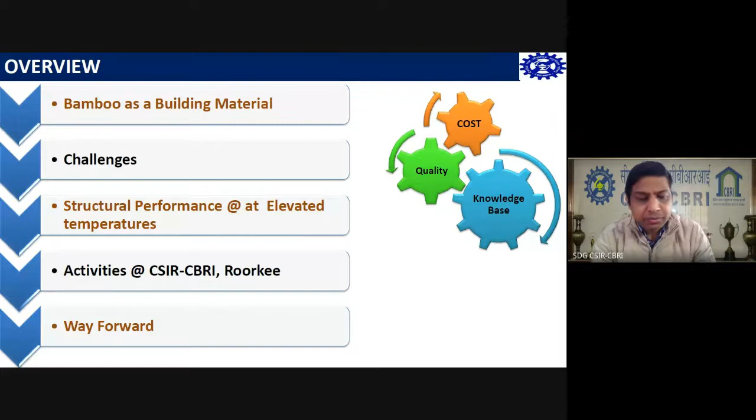Now, to start with, bamboo is naturally, inherently a composite. Right now, if we talk about RCC, RCC is also a composite. Bamboo is a natural composite, but it is a natural product, so it doesn't have - it is imperfect. It is perfect in its own imperfections.

Having said that, it depends on the topography, the surrounding climatic areas where it has formed. If you look at the microstructure, for a layman, or one who sees it in a broader sense, we can see that it is the fibers, the fiber bundles, that provide the strength to this beautiful natural composite.

But it's not just that. During the course of the presentation, I will discuss the parenchyma - these are the structures, the holes, the network, the matrix that holds the fiber bundles together. Now, what role does that have, how does it impact the strength or engineering properties of the material? We'll try to get a perception of that.

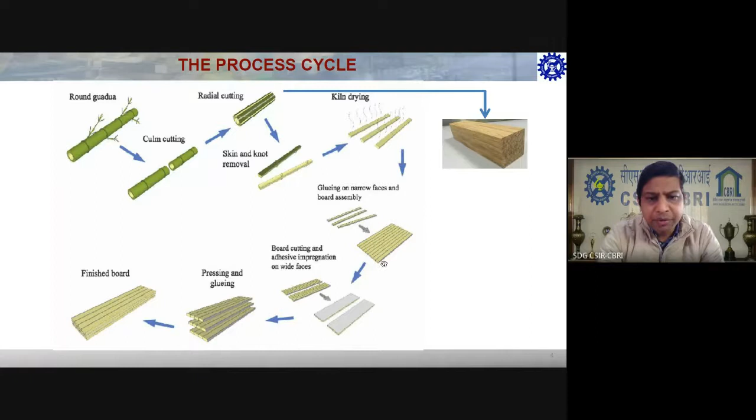Now the process - round bamboo, right now in the construction sector, when we talk about using bamboo as a construction material in structural form, generally we have various processes. The round form, if cut and processed with kiln drying, becomes wood which becomes a scrimber, and from there it can be glued to make plyboard, and the process continues. But in this particular presentation, I would like to confine myself to this type of round culm bamboo - structural form using round culm bamboo.

I personally believe this particular form has a low energy demand, and it is the natural avatar that mother nature has given us.

Other than this, the other things generally incorporate various energy intensive processes, be it gluing and pasting, or other chemical or factory treated things. This particular thing is in a natural state.

So let's talk about, in this particular session, this particular form in its structural application.

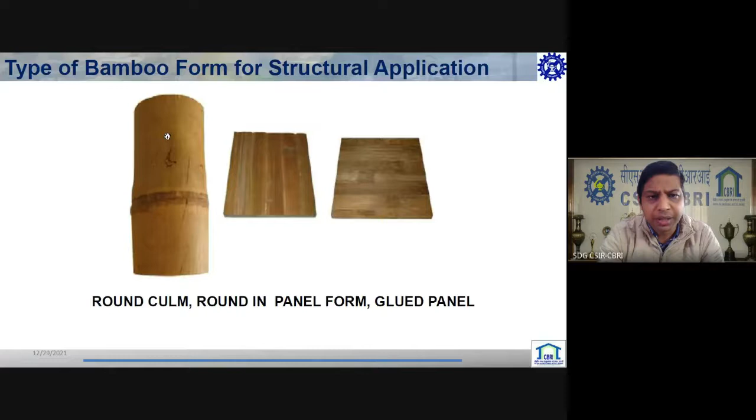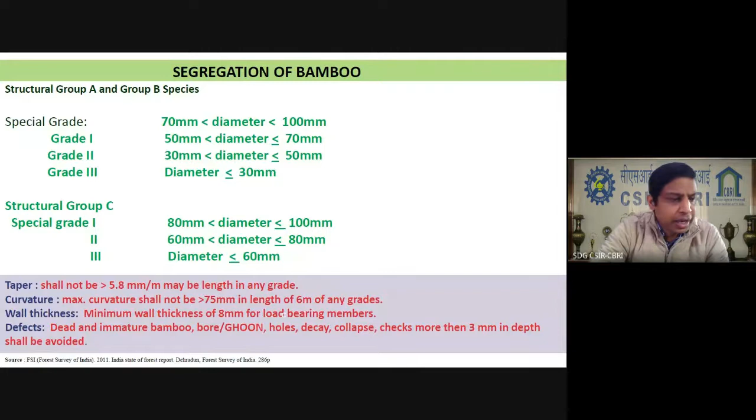As already mentioned by various people, this segregation of bamboo generally can be graded into three sub main special grades, and again this is according to our NBC 2016 guidelines, part 6. These are out of n number of species found in our country. 16 species, as mentioned by previous speakers, have been laid down by our NBC, which can be used for structural application in construction sector.

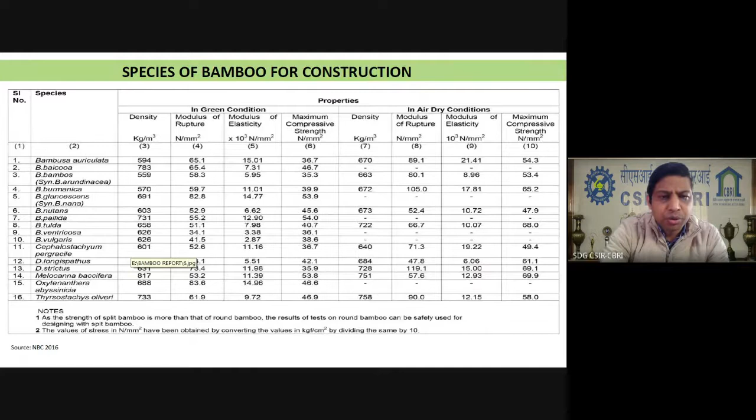In this also, these are all very basic properties which to start with. It's like the ABC which we need, even when we start to design a structure. Okay, these are some of the codal provisions.

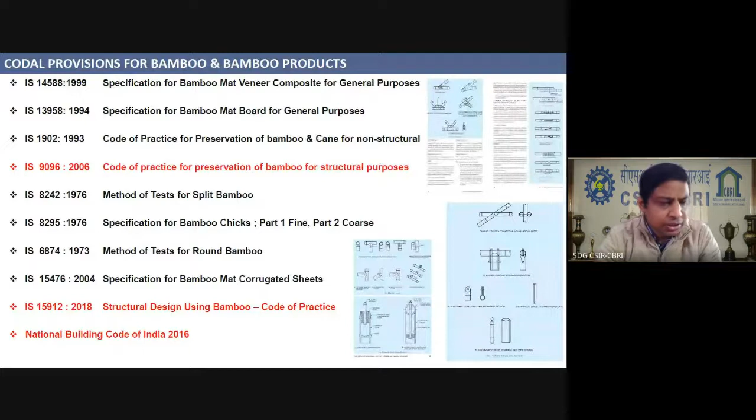As I was very keenly listening to Dr. Manjunathan ma'am, she had very nicely said - I was listening to Pandey sir also yesterday - that we were at the forefront in designing, coming up with the codes. That was a great initiative we had taken, with the 1973 method for testing round bamboo and all.

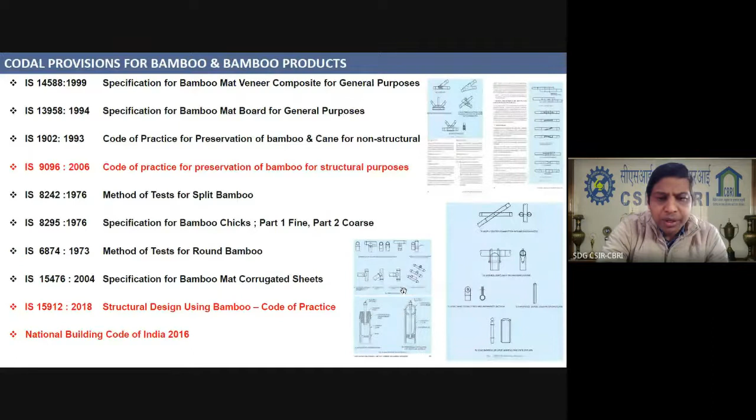But after that, generally it had died down, and we did not carry that forward. Somehow it got lost. So what generally happens, if you can see this, even this code which is recently new - structural designing using bamboo - NBC has very nicely given these joinery issues. One of the major issues in promoting bamboo construction is the joinery issues.

Now if I take a glimpse into NBC, we can very well say they have very nicely mentioned this joint issue, how this can be joined - the lap joint, dowel bars. But what will be the failure mechanism? What will be the load carrying capacity if we keep two dowel bars? And what type of dowel bars? These things need to be quantified, which is in a very nascent state, and our code is generally silent on that.

Now suppose we take this lashed joint. We know it has to be - the gusset plates are okay, chalo, it is steel plate, they have mentioned 3 plates minimum can be used. But when we say about this hole, what should be the spacing of this hole? Because we are not connecting steel with another steel, we are connecting steel with a natural product - bamboo itself is a composite. What will be the failure mechanism?

What should be the strength of this joint, for example this lash joint? And due to the friction, as time passes, what is the loss in joint strength? These things need - until and unless these things are codified and brought into the form of design charts - it is very difficult to have the confidence to design the structures.

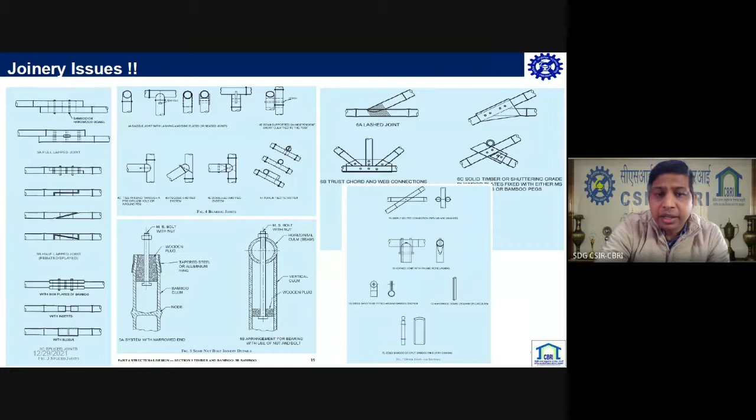And to be very honest, the reasoning behind the results - not all of the reasoning is known to us even now. Yes, bamboo as a building material is renewable, sustainable, protects riversides, strong in the parallel direction to fiber, and captures CO2. These are very good things that motivate us to work.

That's good, but then there's the lack of standards, absence of design books, no regular subject. This is what my previous learned speakers have been saying - we do not have, in the curriculum, where civil engineering students are even exposed to this, low engineers' confidence because of lack of design engineering properties or values.

So if the goal is to move bamboo into practice in construction, what should we do? There is another big issue - supply and demand. How to guarantee supply and demand, guarantee a market to motivate investment in bamboo production, and ensure enough bamboo of high quality, good quality material is used to increase user confidence.

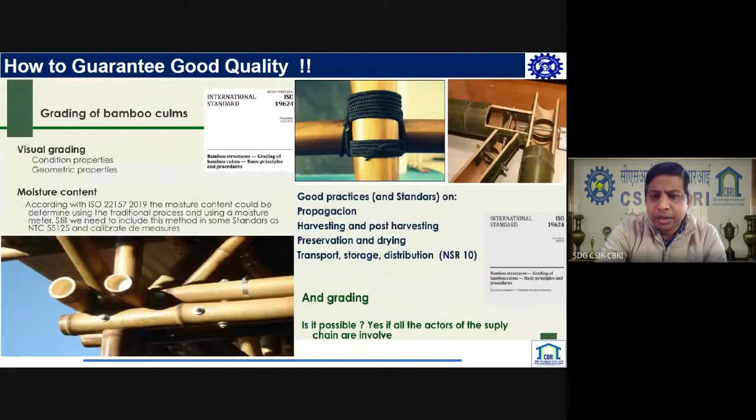Yes, people are working really hard in mainstreaming it, and I'm very hopeful that within the next year or so we can have systems where we can have the protocols of algorithms where we can generate machine grading algorithms for grading of bamboo.

Now, if I simply go into these joinery systems which people have been using, these are traditional, which look beautiful. But again, as I said, they lack engineers' confidence. What is the strength criteria? What will be the loss in strength when subjected to fatigue loading? Because the structures are lightweight, from an earthquake point of view these are very stable. It doesn't have that much effect, but it is more susceptible to wind loading.

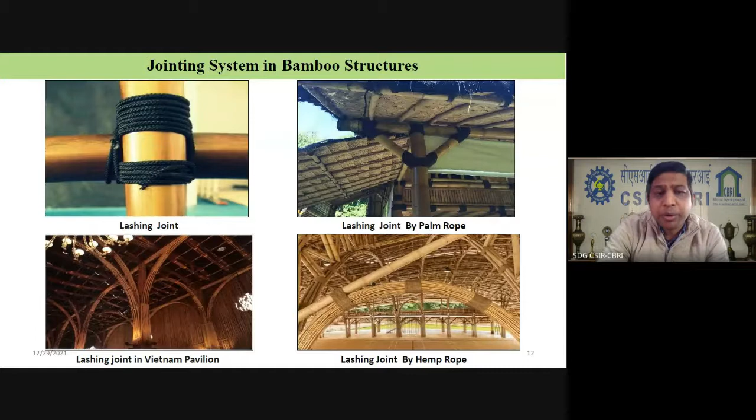Now if we come to this type of man-made structure, these are all traditional and it was going well, our forefathers have been using them. But when we go about jointing systems using bolted joints, this creates an issue because there is a difference in coefficient of thermal expansion between this natural product, that is bamboo, and this MS or steel pins. Now what effect will it have? It will generally have a drastically detrimental effect on these connections because of the difference in coefficient of thermal expansion, and that is really not a good thing in the long run.

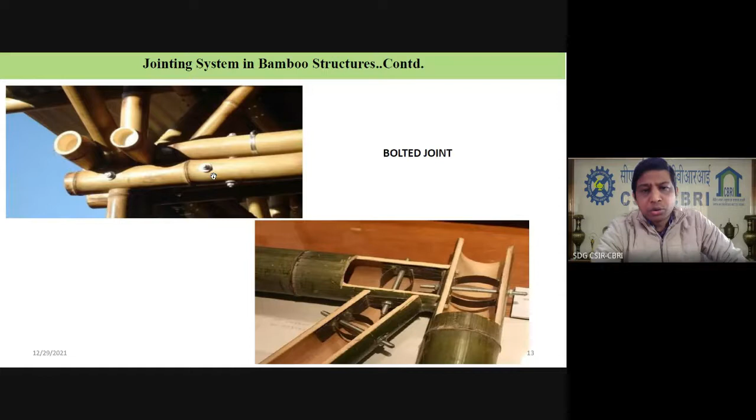Now, how to overcome this? We have to join the structures, and we cannot use this; it is not preferred. People are working, and these are the easiest. The easiest one is to have these dowel connections, creating nut and bolt. But in the long run, if it is a climate which generally has a large difference in day and night temperature, or in the summers it can become very hot, that will affect this natural material bamboo in a very wrong way.

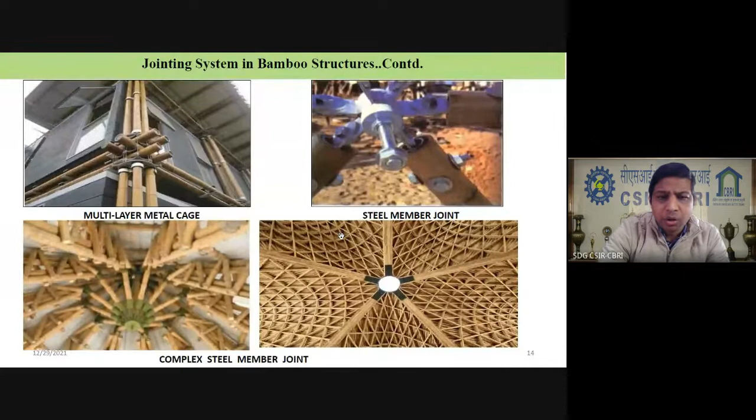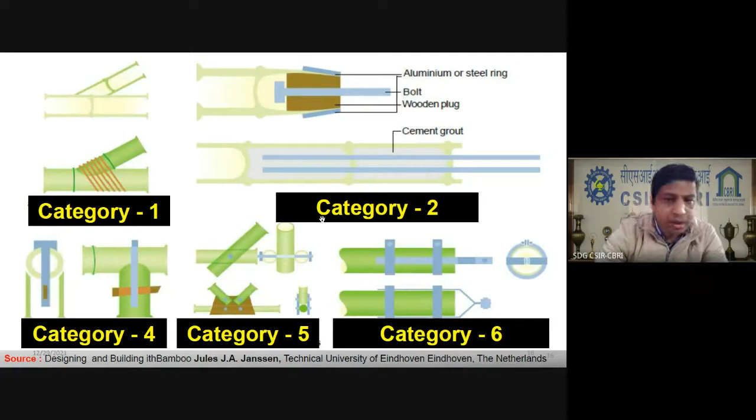So yes, there are certain types of joints. These are all in literature and available. There are basically 6 types using traditional joints, I'll say, using dowel. If we look into it majorly, we do not have a choice right now where dowels can be made of any compatible grade material with bamboo. It is still made with the same steel material, and it really affects that.

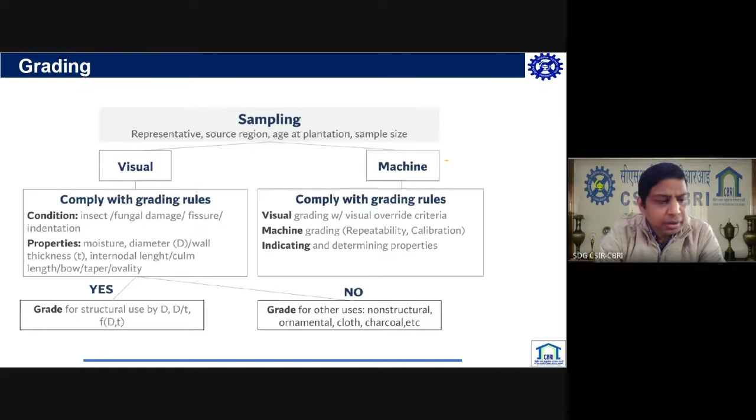Now, grading, we can say it is sampling. Basically, when we take up a project with bamboo as a building material, we need grading. Visual grading generally complies with grading rules: condition, whether it has insect or fungal damage, fissures, or properties: the moisture content, diameter, thickness, internodal length, taper, what is the bow.

Now, these are all codified by our own IS code. What should be the taper length according to the height? What should be the minimum diameter, minimum thickness of the wall? Right now it is all prescriptive. If we are not doing that, what will be the degradation in strength? What role do the OD, meaning outer diameter, and the ID play in imparting strength to the bamboo culm? This needs to be well codified and documented, so that we have the confidence to use it as a main grade structural material.

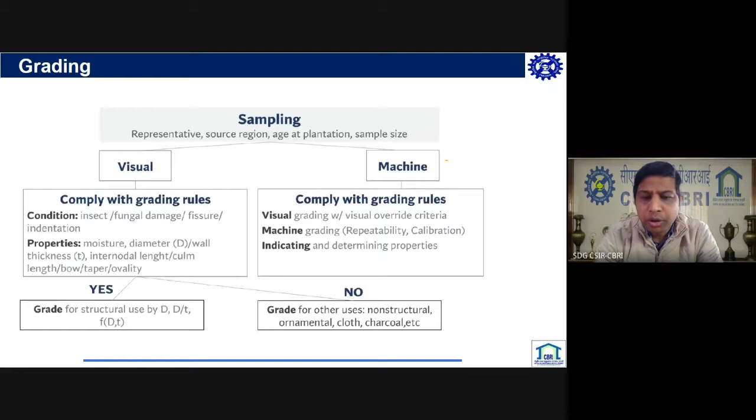Now, moving from visual to machine, is it even possible to grade this natural material using machine learning? Yes. How can grading work with visual override criteria? I mean, machine grading will definitely give repeatability and calibration. We do not have to wait for a person with certain experience. It will be an open platform, and those algorithms can be designed free of cost, and they can help us get away from human error and time consumption. So yes, secondary properties like species can also be machine graded, with extensive studies.

Till now, the majority of studies have been done on the fibrous constituent of bamboo, the fiber. Generally we know that when a bamboo structure is loaded, it has a tendency to sag, which happens because of the low E value. Then generally we have splitting issues. These are all because of the fiber. The fibers are placed in the longitudinal direction, and once it splits, it creates some issues.

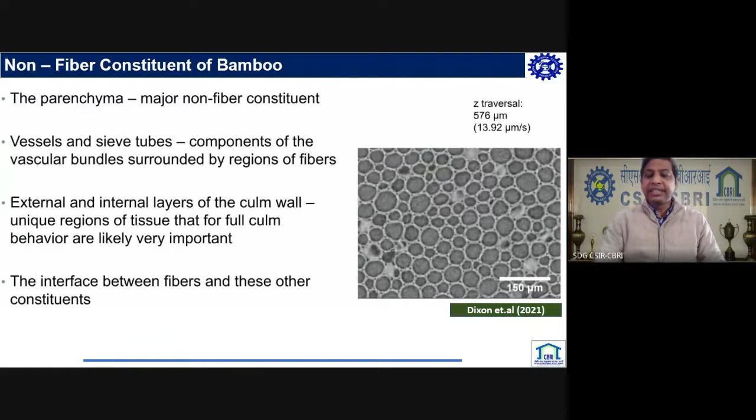But what about the non-fiber constituents? Do they have any role in it? Well, in fact, they do have a role. If you can see, these are all bundles, bundle fibers. I'd like to highlight one small point the listeners can correlate. We have ITZs in concrete matrices. How does the ITZ play a role? We have weaker zones and a stronger aggregate cement mortar. In the same way, the non-fibrous constituent also plays a major role in determining the joint criteria.

Now, this is Professor Rica in 2020. It's a latest paper where he has calibrated and tried to correlate how, in this zoomed view, the non-fibrous component is playing a role. Now, this is a very interesting parenchyma thing. I hope the screen cursor is moving. Okay, fine. If you can see, this is a bamboo. If I need to test it under compression, we'll put the bamboo and compress it. If it fails, we say the fibers have yielded, split, and given way. So we say that is the load.

Now, I want to test the parenchyma, the matrix which holds these fibers. How do I do that? How can I separate the bamboo fibers from the parenchyma and test the strength of the parenchyma? Structural engineering students and faculties who have joined will appreciate there are two types of nonlinearity: material nonlinearity and geometric nonlinearity. To study material nonlinearity, we need the material extracted, which is again difficult. For material, we can do slicing, take it out and test it under the microscope. But what about the geometric nonlinearity?

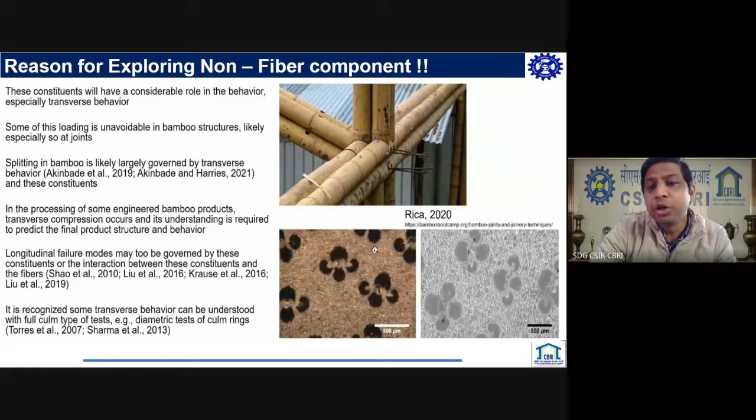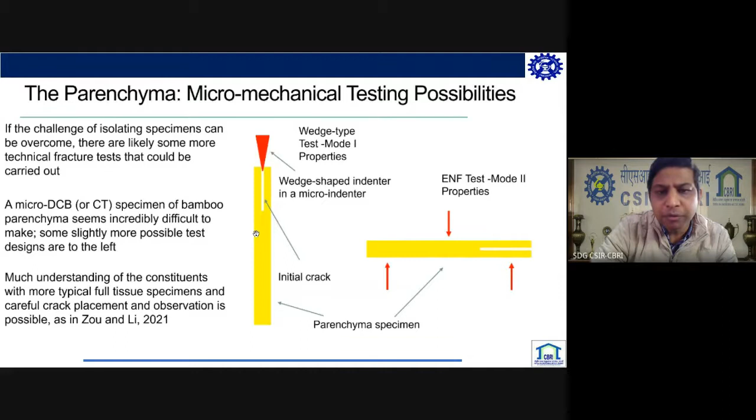And when we understand the material well, so yes, when we design a lateral load supporting system, we have to take the limit states, considering the strength of parenchyma into the design consideration. Now, moving forward, there are all micro mechanical testing possibilities, which are in a very advanced state. These are all very latest papers, and how to test them can be referred to. I will not go into much detail on it.

Now, this comes to a capacity-based design approach. Why a capacity-based design approach? During the course of the presentation slides, I will say why this capacity has come. Now, when we talk about bamboo as a structural material, with RCC we know what the failure criteria are that we need to design the structure for. For example, we always under-reinforce the RCC component. Now, in this particular case, which failure will we say is the probable failure, the failure which we need?

Sorry, I have not mentioned the paper name. I think it is missing, but no issue.

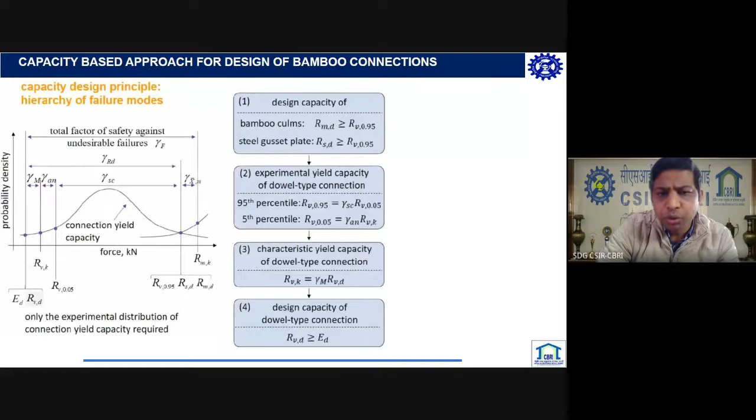It's a work of Dr. N. Pradhan, a researcher at Hong Kong University, where he says we will not allow the bamboo to yield. Before that, the dowel should yield. He has given a notion which again has some limitations, but he has given an approach which has positives and negatives. Now, what positive does it have? We will not allow the bamboo to yield. That creates some issues, which can be addressed by the type of connection details with bamboo and steel and the bamboo detailing. In due course, I will try to show that.

Now, coming to this, what about elevated temperature? Generally, we have a notion that this is a wood and it can get burned, right? It can burn, and in fact, it does. I personally have a few experiences, and the speakers from industry might also. In the last year itself, there were a few bamboo buildings, forest research and forest guest houses and offices, which were gutted completely when a fire took place.

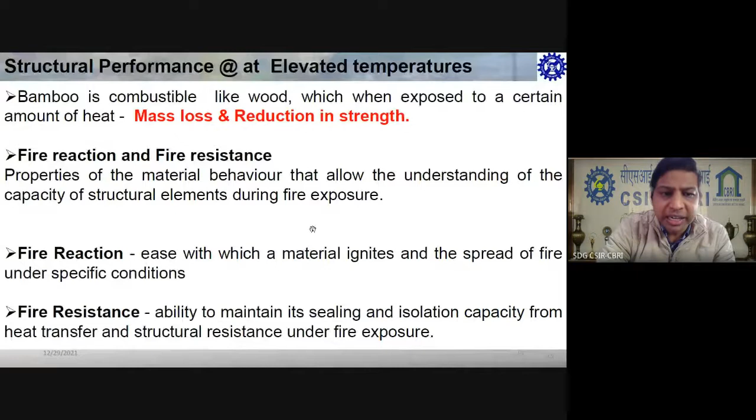So can it be designed? Can it be addressed? Well, it can be. It can be like concrete itself. We do not build buildings only of concrete; we use RCC. Now, if that can be composite, why not here? So can that be an answer to it? To some extent, yes, we can.

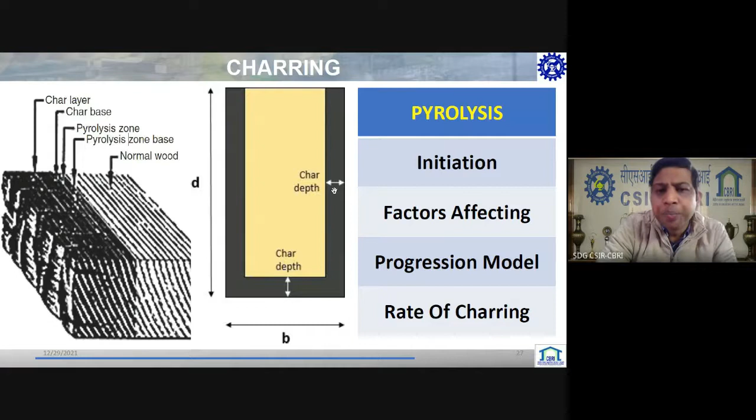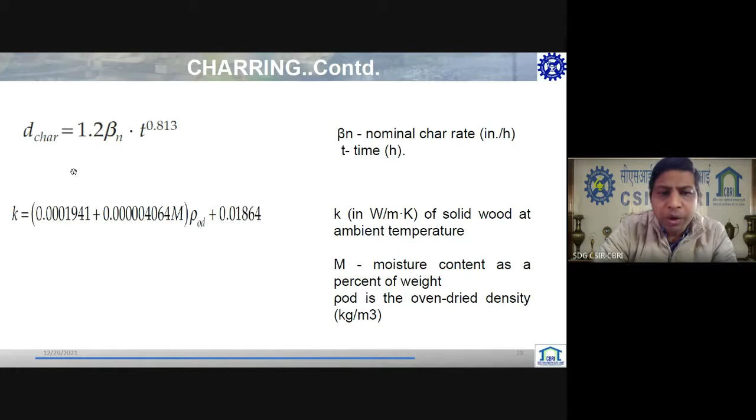Now, when this takes place, a charring effect takes place. There are initiation factors, then there is a progression model, the rate of charring. When charring takes place, the same thing happens with bamboo, considering it as a wood, so this char depth needs to be controlled in order to come up with design guidelines. These charring depth criteria and empirical analytical equations have been taken from the timber design theory of the American code, which is well laid down, and it appears to be in sync with softwood design theory.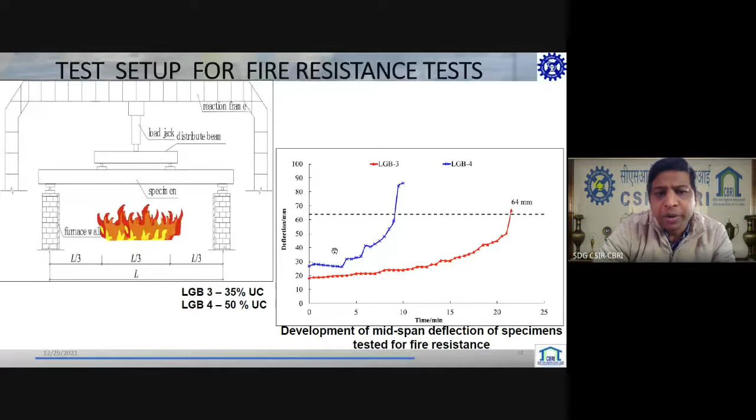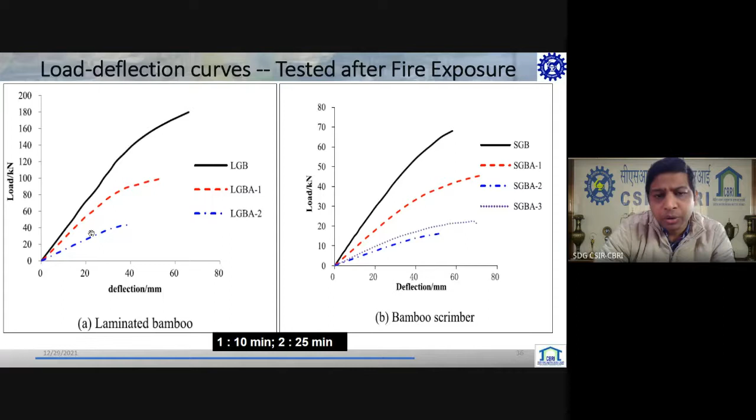This is the performance of engineered bamboo beams. When we engineer the bamboo, what will be the effect, how the mass loss is taking place, and can it be controlled? These are some instrumentation and load deflection curves. At the end of the day we need load deflection curves, though these are all ultimate capacity fire design. These are the strain and cross-sectional variation, how the cross section varies under fire loading.

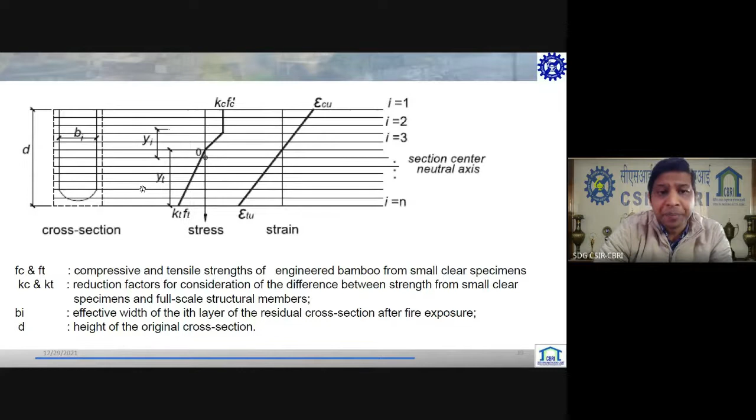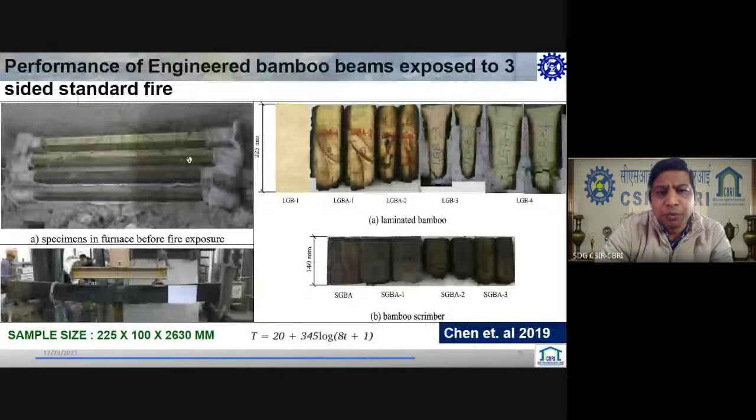Now, yes, the strain distribution at the mid-span cross-section is linear for all specimens, as you can see. So no premature breakdown of the adhesive system is used, because where did the adhesive system come from? Adhesive system, because these are all engineered woods. Generally, it is not the case, because as I said, these are not in the natural avatar. Bamboo is not in the natural avatar, but yes, it can be. So simple sectional analysis can be carried out to find out the moment carrying capacity.

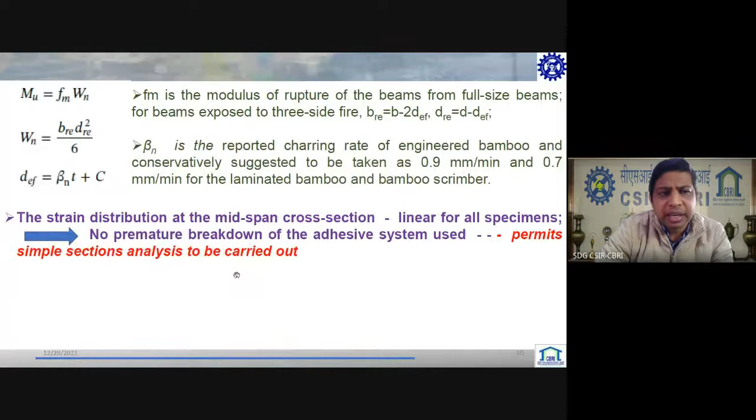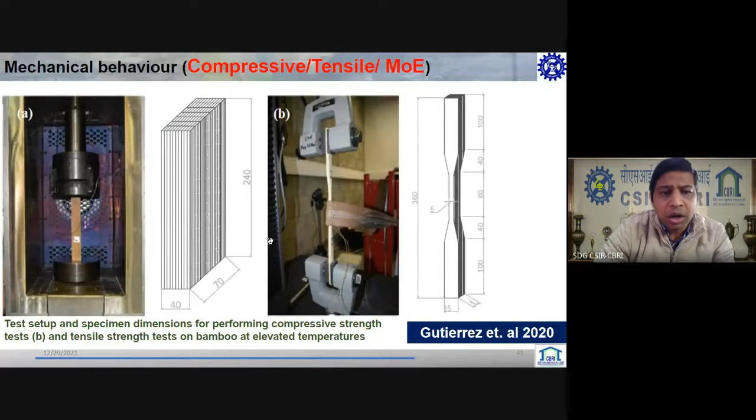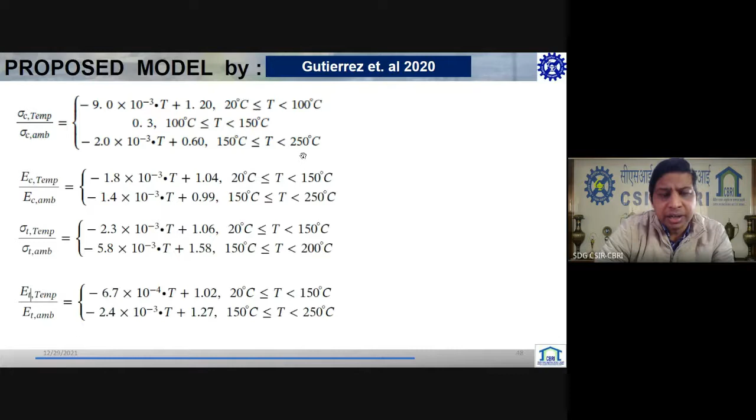Now this particular gentleman, they are all recent papers, and all credit to him. They have come up with the E values in tension and compression at elevated temperature. These are all under compression, these are all under tension, and again compression and tension, and he has given this proposed formula. This is ambient, this is from 150, this is from 150 to 250. So yes, there is some reduction in the E values, but yes, it can be designed.

We have the values. A structural designer, apart from the E values, is more concerned with the nature of failure, whether it is a ductile failure. Is it giving sufficient warning before it loses its strength, how the post-yield behavior takes place? Until we have those graphs, that will not inculcate confidence in civil engineers.

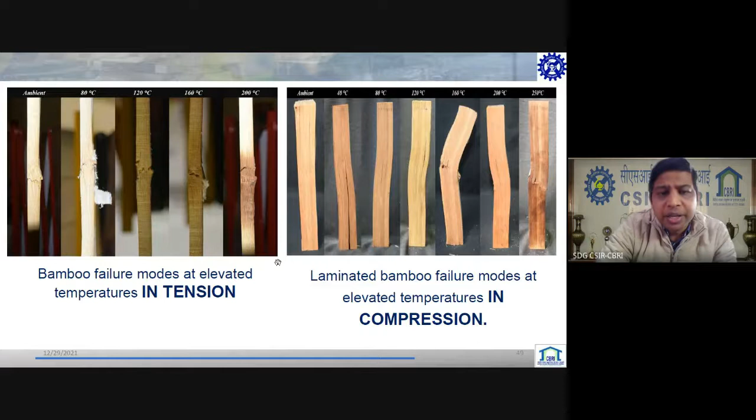Now this is minimum 30 to 40 years back. The code came in '74. It's good enough. So can we move from this to make it mainstream? Yes, we are working on developing algorithms, and I think in the very near future we will be able to have machine grading for this.

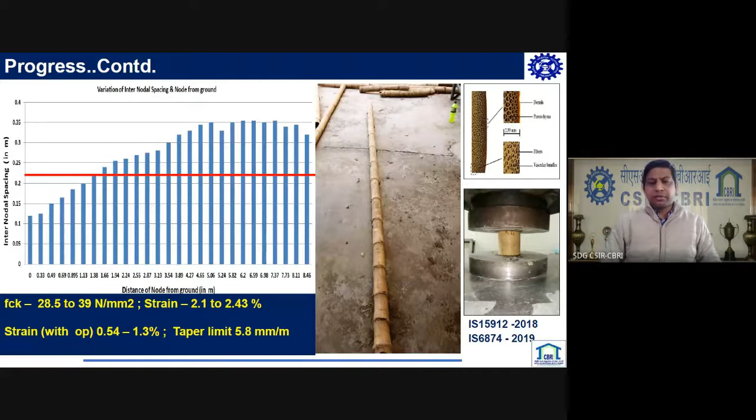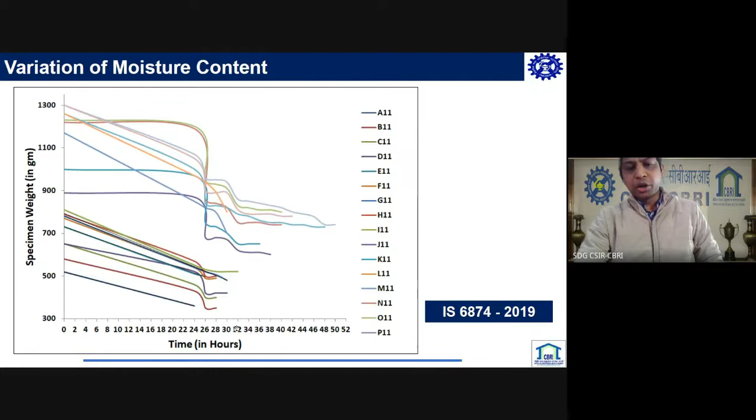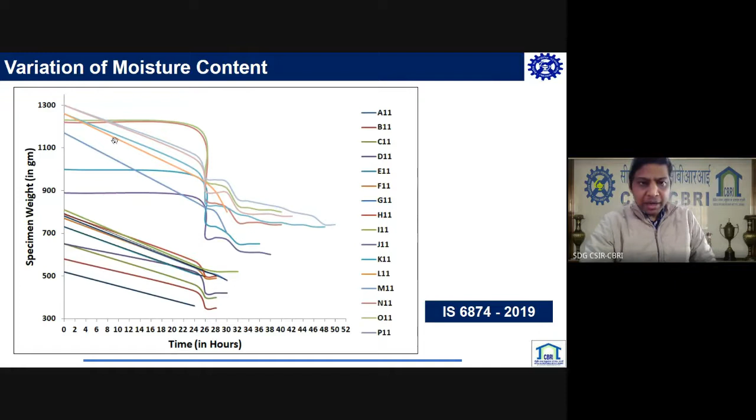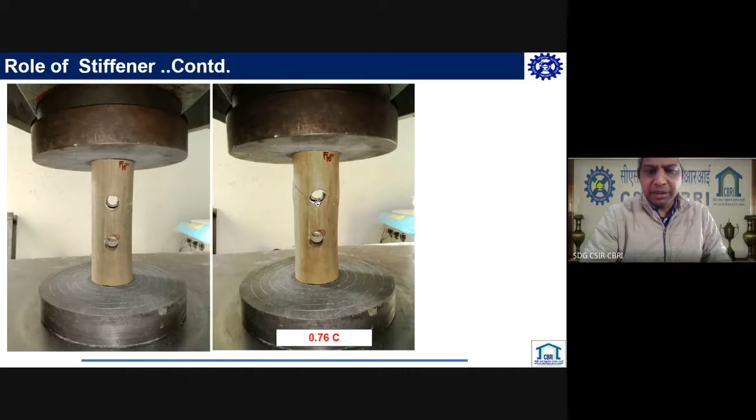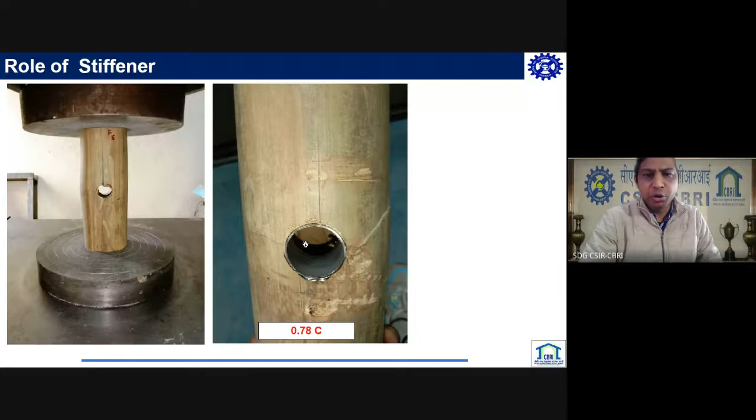Now our artisans all come up with the fact that bamboo splits, and it does split whenever we are putting a bolt or nut. So we tried to find out, can we put a stiffener, and yes, we tried that, and there were some interesting results on the splitting. I think we have taken a wrong pick; we should have compared a normal one. No issue. If there is a normal one without a stiffener, the failure pattern will completely pass from top platen to bottom platen. But when we put a stiffener, it does arrest it, and the failure pattern changes.

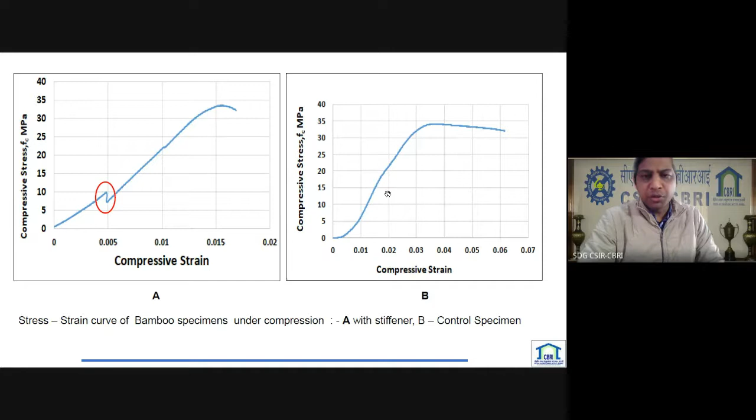And does it take the load? Oh yes. It can be just for a preliminary; these are all raw data. So these are all compressive strain. This is the load carrying capacity of a bamboo pole specimen without stiffener, and how a stiffener is taking the gradual load. These are quite fascinating.

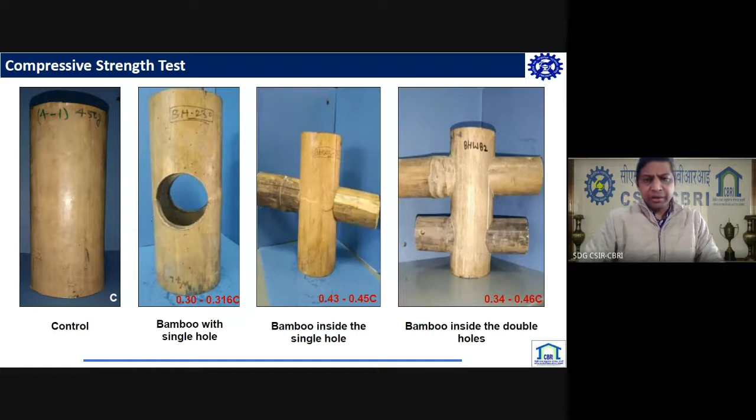Then we did a lot of testing on how the strength of the bamboo decreases or increases when we put various types of connections, and we have got very good insight into it. There's this dowel pin. What is the optimum size of this dowel pin? Why only 8 mm in the market? Why not 12 mm? Definitely it decreases the strength, but how much? What is the optimum size? If we remove these dowel bars and replace them with bamboo pins, does it have a positive impact? Oh yes, it does.

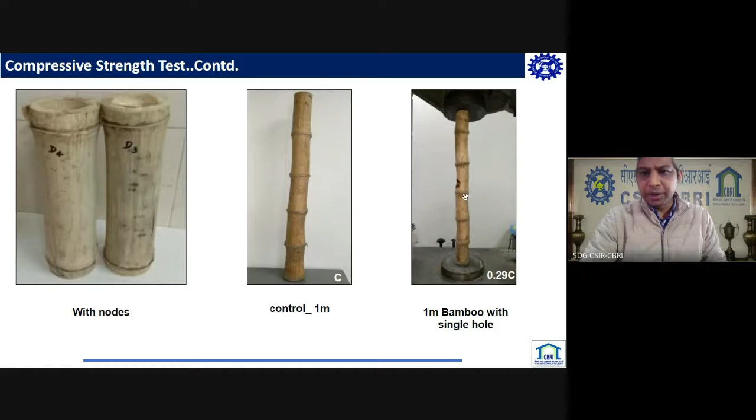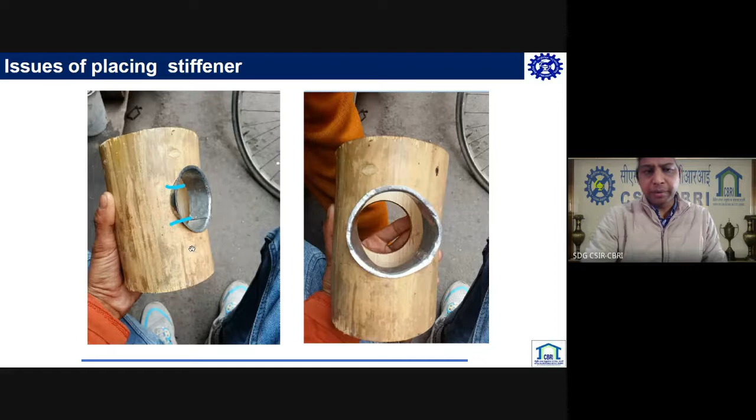Control specimen: we tested 1 meter specimens, and we have got very beautiful insight. What about our connections? What is the decrease in strength? Even if we are adding stiffeners, what are the challenges we face when we do a stiffener at a bigger scale? These are becoming challenges.

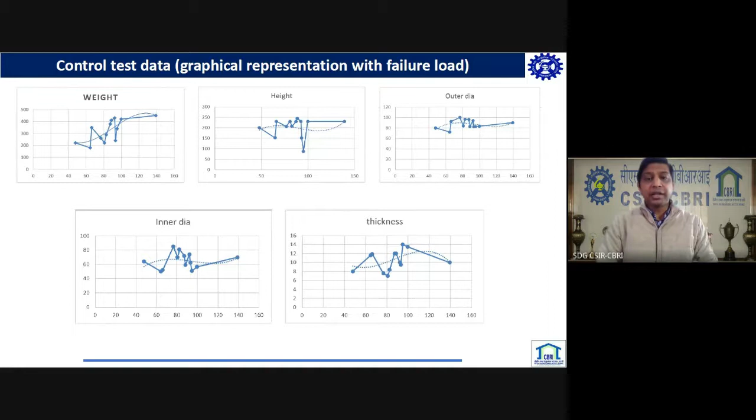Now, what are the parameters that affect the strength of these things? For a single specimen, we have five parameters which play their role in determining the quantification, and we could do it, and these are all the gradual variations. Then what is the significance of weight, height, ID, thickness, how each plays? It has got individual contribution, how individual components contribute to the overall strength of the material.

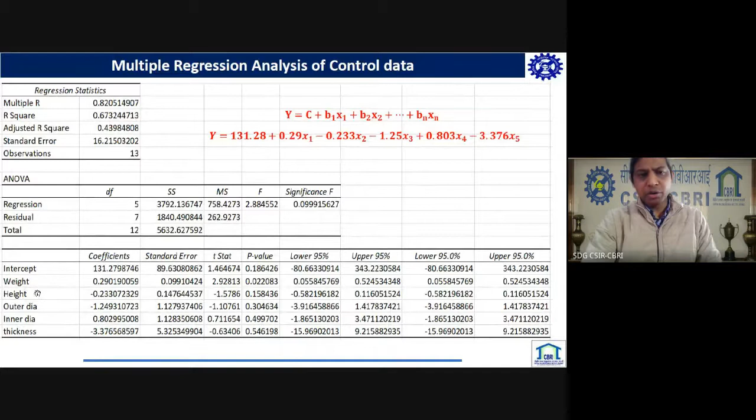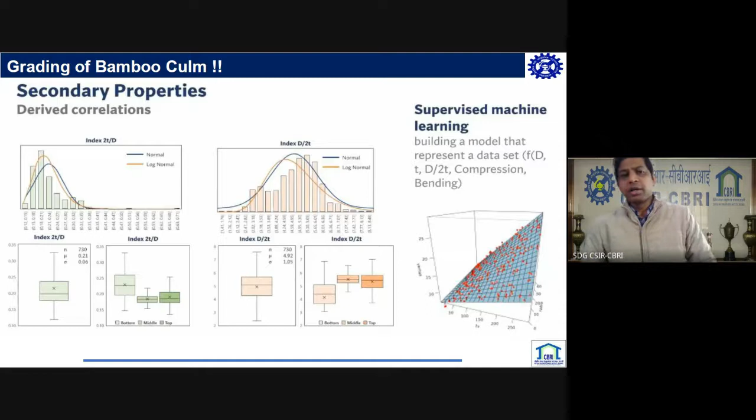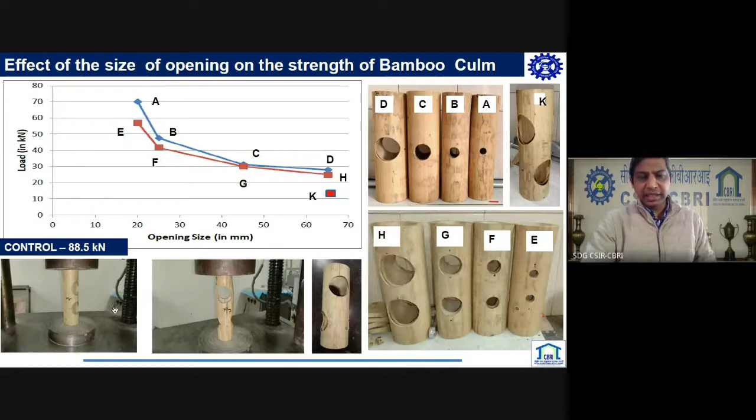Now, these are all supervised machine learning people are trying to do. We have also tried to incorporate this - it's in a very nascent state, but it's got a very promising thing which will help in making bamboo a mainstream construction material. The only purpose of discussing these things is to fight the perception that bamboo is no more a poor man's material. It is as good as, if not better than, comparable conventional building materials like cement and concrete. Now this again shows how with the opening, the load and opening size changes, and how the strength gradually decreases.

While doing that, we faced so many issues in machining and so on. So this is a typical thing which we have created - because of IP issues, I cannot show the main photo, but it is in a state. This is how we have created it, and it has got promise. Once it comes out, we'll try to disseminate it to the public.

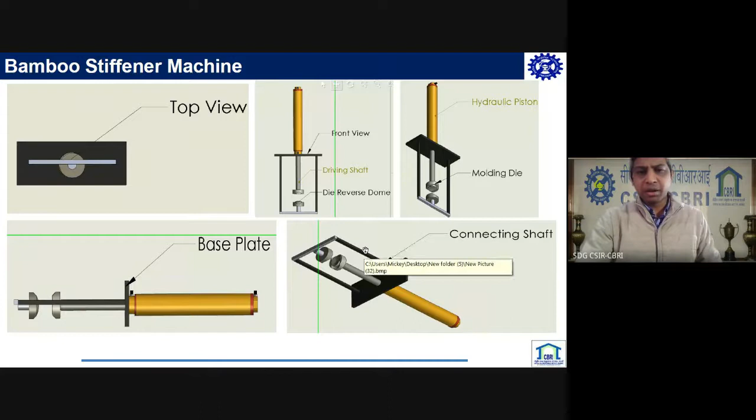Now comes the numerical modeling. Experimentation is not an end to it - we have to go with numerical modeling in order to escalate and scale it. In economics, we call this the scaling effect - how we can scale it up.

Now testing - there are 16 species. If we talk about the 16 species, strictus is there, Bambusa balcooa, tulda, and so many other things. I keep discussing with my friends at IPIRTI and other research organizations about their work. There are many things which if we start experimenting on, it will take ages. And the crux of this is we do not have time - nobody has time. We cannot wait, like what Das sir was sharing yesterday regarding that Meghalaya project. We generally do not have time, so numerical modeling can play a great role there.

Now, numerical modeling - what are the challenges? The challenge is how to model the gradual variation. Can it be a static linear model, can it be a stepwise function? What are the coefficients of variation? How can the rule of mixture be incorporated? What will be the random variations?

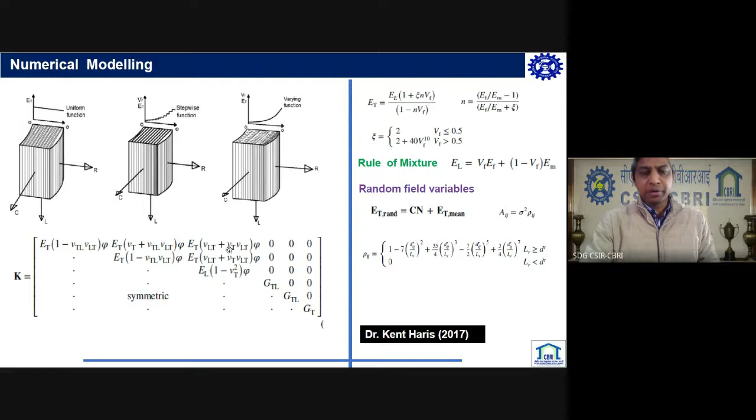This approach is given by this professor - he's a pioneer in bamboo construction and engineering, and on that basis we are developing this numerical modeling.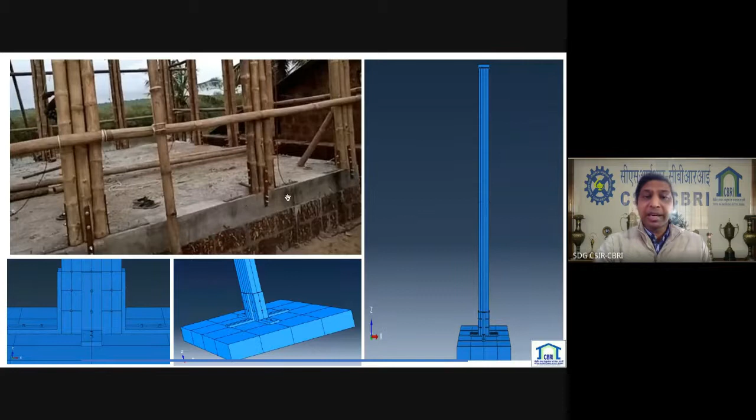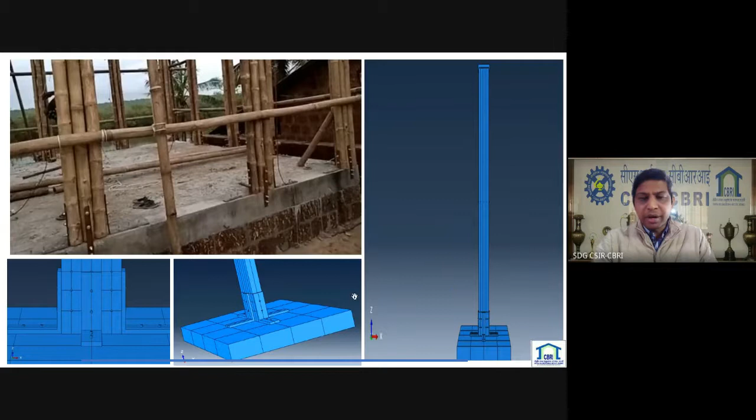So generally we are talking about so many things - numerical modeling, nonlinear regression, material characterization. But in the field, what they are actually doing for a G+2 cottage, from their experience, is generally a 3-pole system or 4-pole system. This is in areas with high wind load capacity. So they are coming up with small strips, but are they viable? What about the multi-hazard scenario? What wind strength can it withstand? To assess that, we have modeled it in Abaqus, and we are getting very good results out of that.

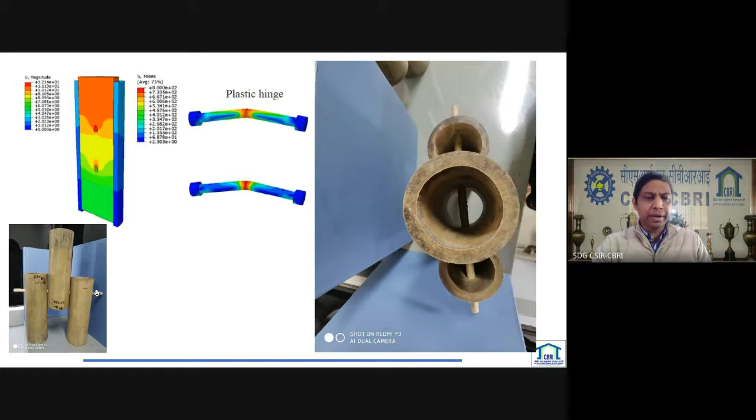Now, how do plastic hinges form? These are the types of experiments - this is a bamboo pin, showing how the failure pattern takes place. Another interesting thing is how this happens when we put in dowel bars. This is a composite itself - a natural composite - and the dowel bar is another material, though it can be steel, concrete, or bamboo. We look at how it reacts, how the strain variation takes place, since we all know when we put in a bamboo pin or dowel bar, it eventually fails.

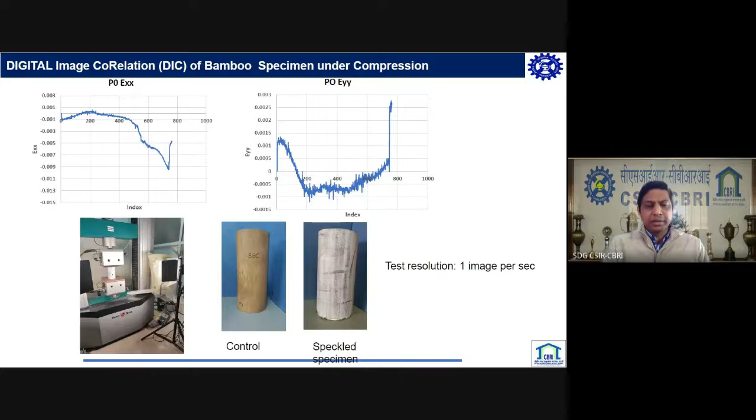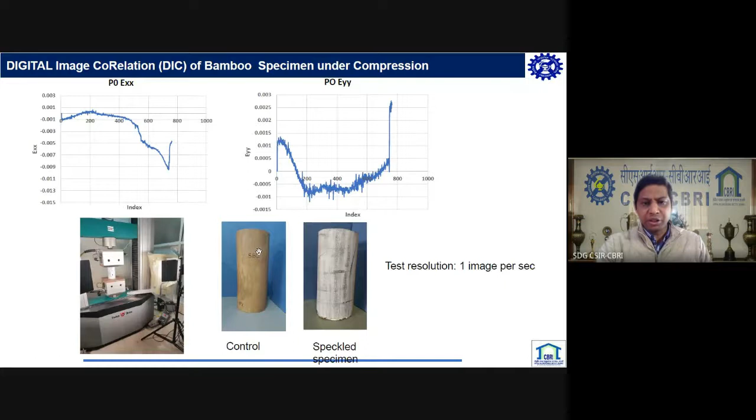In our laboratory, we have the facility of DIC - a 2D DIC system. With Dr. Ganesh, we tried to perform experiments in his lab, where we put bamboo specimens with various types of openings and pins, just to see how the strain variation takes place.

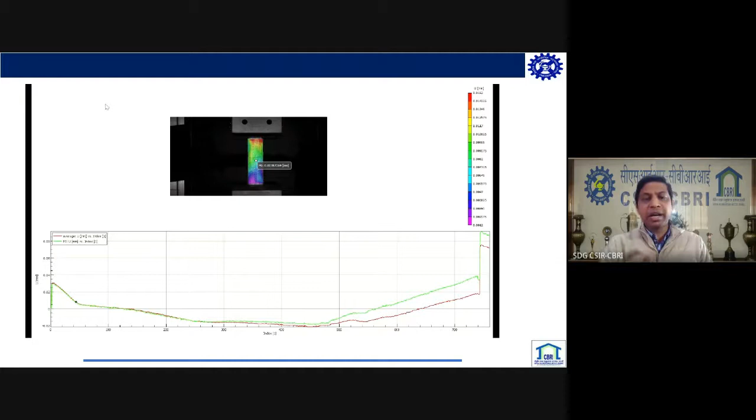After the end of this presentation, I'll show some videos where, if there is a pin, a dowel, or any other thing, how the material is behaving - what is the stress formation, stress contours. If we know that, we can design where exactly we can do a hole or an opening for connecting. These are all very interesting things which you have found out.

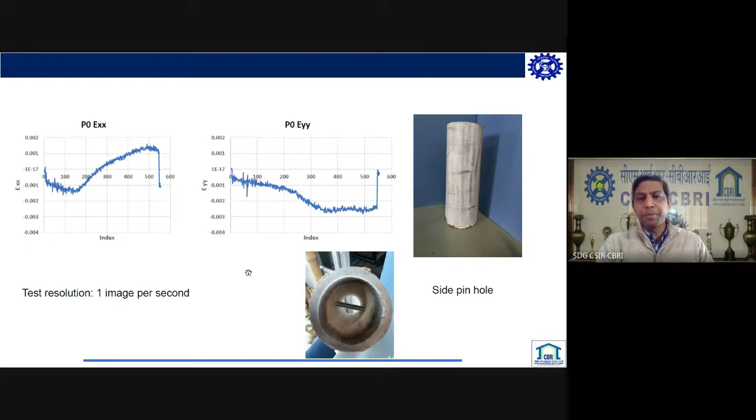Now, again, these are all completely raw images, raw data which we are producing. I'm just showing 10% of this because it needs to be published. But I would like to see what this red color shows. I'll show you videos where it shows the stress variation taking place for this limited height.

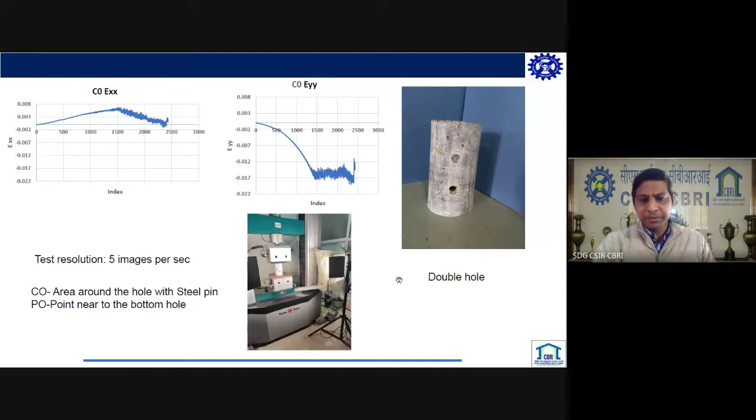This white part is actually a process where it takes photos at a particular rate, and from those photos it is correlated how the strain variation is taking place. This is a beautiful facility that we have here. I'll show you videos of how, when there is an opening, the stress formation takes place.

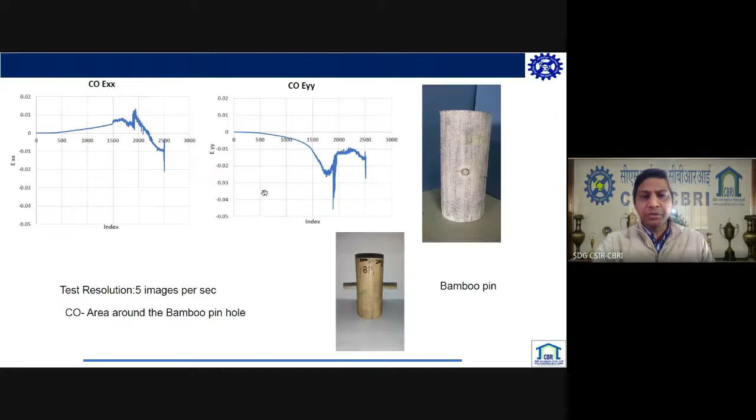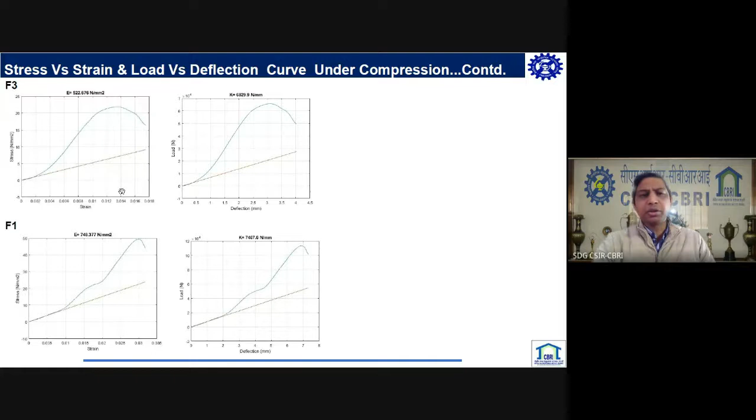From obtaining those things, we generate deflection curves and stress-strain curves of any material, any composite - bamboo is of great demand. We are yet to finalize these; they are all in a preliminary state. These are not exactly true stress-strain curves because of the platen effects. But to give a thorough initiation to this perception, yes, we do have results.

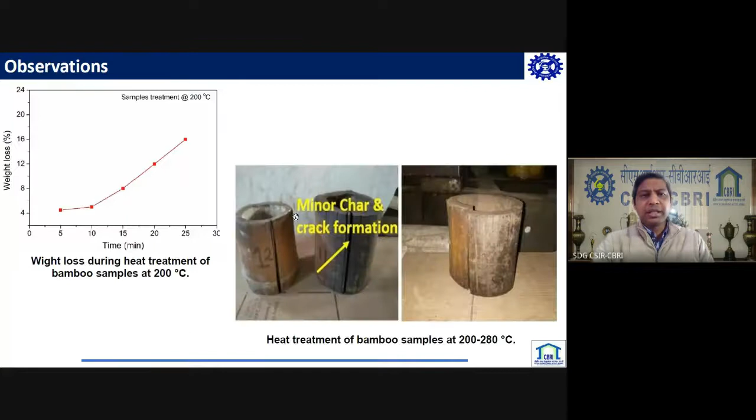Then, under fire, we tested something - these were some results. Generally, these are some observations that we found for bamboo under elevated temperature around 200 degrees. Bamboo retains 20% of the compressive strength, 70% of the modulus of elasticity, and at 200 degrees and above, around 42% of the tensile strength.

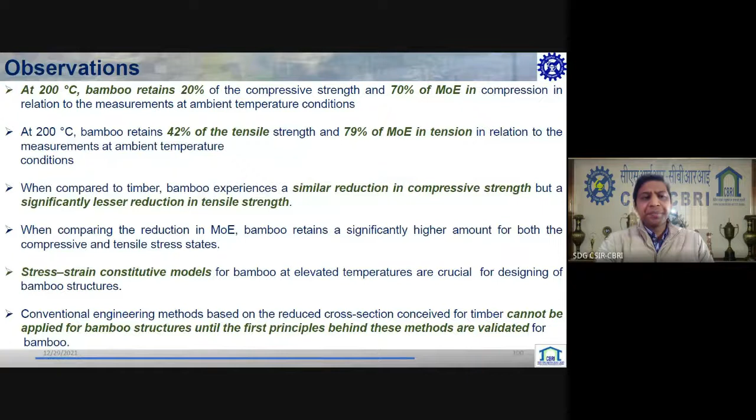When compared to timber, bamboo experiences similar reduction in compressive strength. Stress-strain constitutive models need to be developed if we need to come up with more engineering or limit-state based design. Moisture content varies along the length of the bamboo culm. Size of the opening of the bamboo culm affects the load carrying ability - the load carrying capacity (FCK) decreases 1.5 times for every 30% increase in opening size. So we should be very careful.

This doesn't deal with the bamboo pin - bamboo pins or dowel bars work in a totally different way. How do dowel bars take place? It's a totally different game altogether. Stiffener helps to stabilize the vertical splitting, by stabilizing and arresting the local crack.

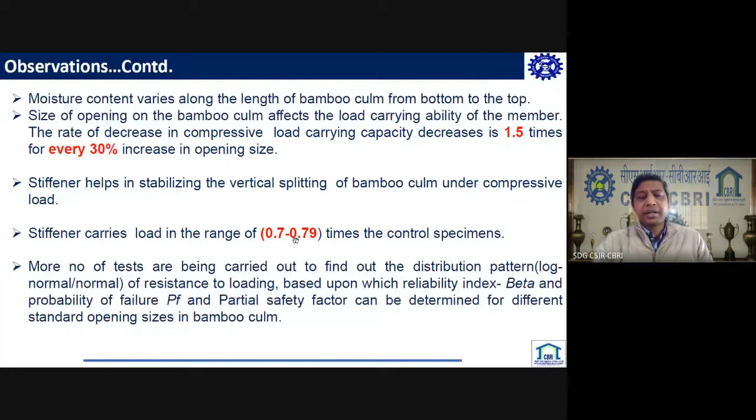But what should be the optimization? We cannot have an infinite number of stiffeners. We should determine what is the ideal thickness of the stiffeners, which does not incorporate lateral instability to the system. So this is still ongoing work, and partial safety factors need to be designed depending on the reliability indexes.

Future scopes: good documentation practice needs to be done. Machine grading is the future - that will inculcate the confidence of the designer and researcher. We generally do not have an issue of using standard cement brands because we know it is factory graded, it is machine graded material. That confidence can only come when we have a system where we put our structural or building material in a machine, and it will grade it A, B, C.

I have not shown it, but we have taken some good initiative in seeing how this machine grading can be done. Database - many people are working on determining the geometrical and physical significant properties, how they change. But a database needs to be created. It will be of great help in promoting bamboo as a mainstream material.

Then, identification of failure modes - it is not only about the load. If it doesn't have a post-yield behavior, then it will not be that thing which can develop further. Failure modes need to be identified. We need to develop test methods for connections. ISO standards we do have, but for connections, yes, it needs to be developed.